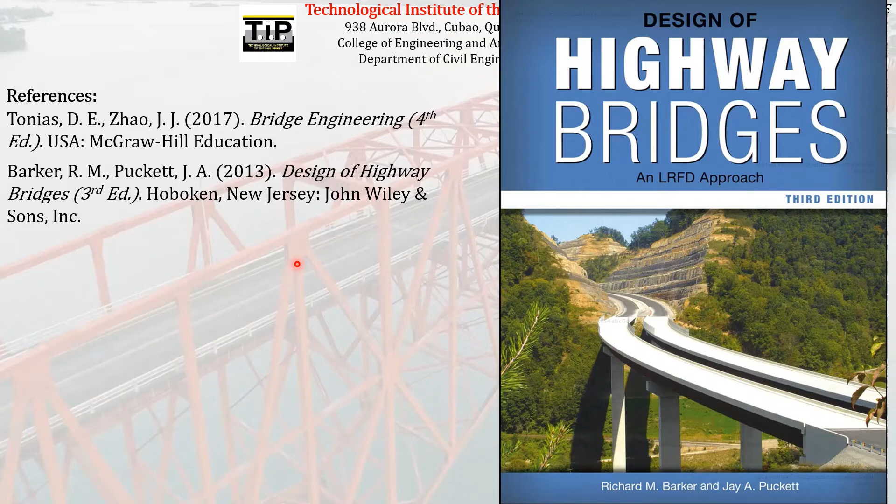And lastly, our local code that I will be using is the DGCS, the Design Guidelines, Criteria, and Standards, Volume 5, Bridge Design, 2015, from the Department of Public Works and Highways, Bureau of Design. So I have used AASHTO 2012 because as I checked, our local code is still using the AASHTO 2012 edition of the code. Although there is already a newer version of AASHTO, since our local code is still using AASHTO 2012, we will just stick to that edition of the code.

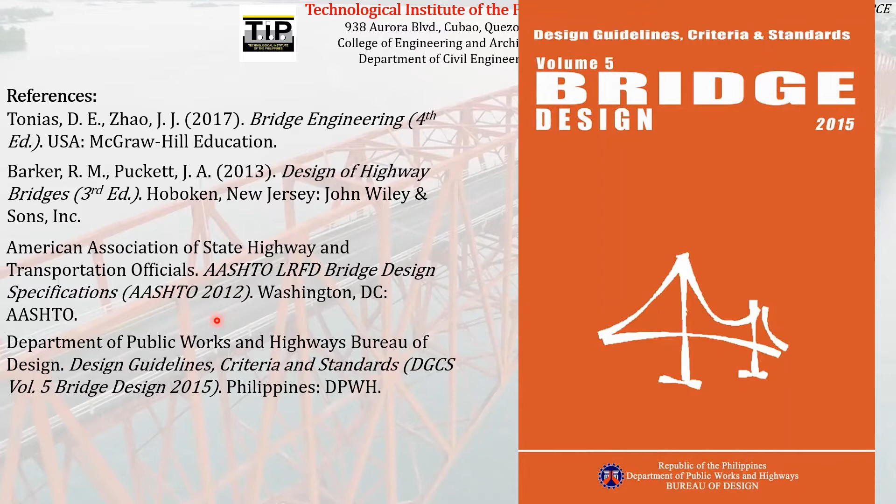And then lastly, the last reference that I have used is Google for some images and video clips.

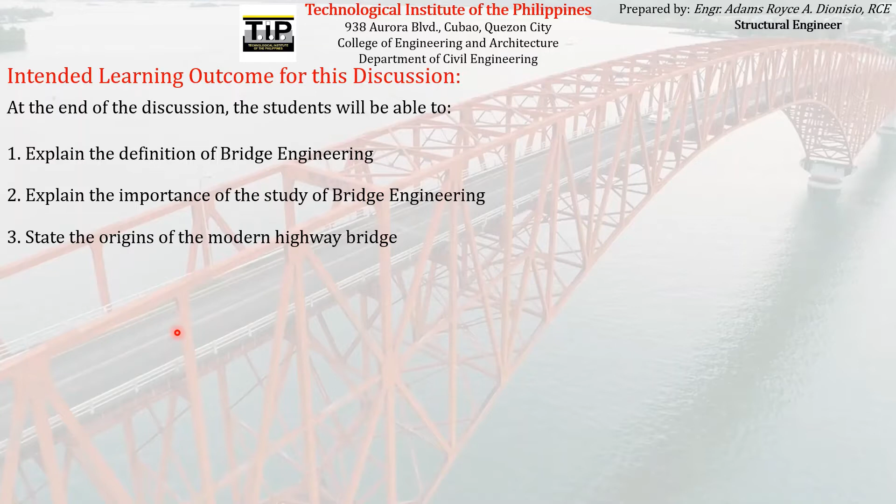So our intended learning outcomes for discussion are this. At the end of the discussion, the students will be able to: number one, explain the definition of bridge engineering; number two, explain the importance of the study of bridge engineering; number three, state the origins of the modern highway bridge; number four, define the different terms used in bridge engineering, especially the different parts of a bridge; and number five, define the different structure types used in bridge construction. So these are our goals for this discussion.

So at the end of discussion, I expect the students will now be able to explain the definition of bridge engineering, explain the importance of the study of bridge engineering, state the origins of the modern highway bridge, define the different terms used in bridge engineering, especially the different parts of a bridge, and lastly, define the different structure types used in bridge construction.

So without further ado, let us now address our first goal for this discussion, which is for you to be able to explain the definition of bridge engineering, and immediately after that, let us address our second goal, which is for you to be able to explain the importance of the study of bridge engineering.

So before we start to define the subject bridge engineering, maybe we need to know first what is a bridge. Because as the subject tells us, bridge engineering, we can easily tell that the subject is all about bridges.

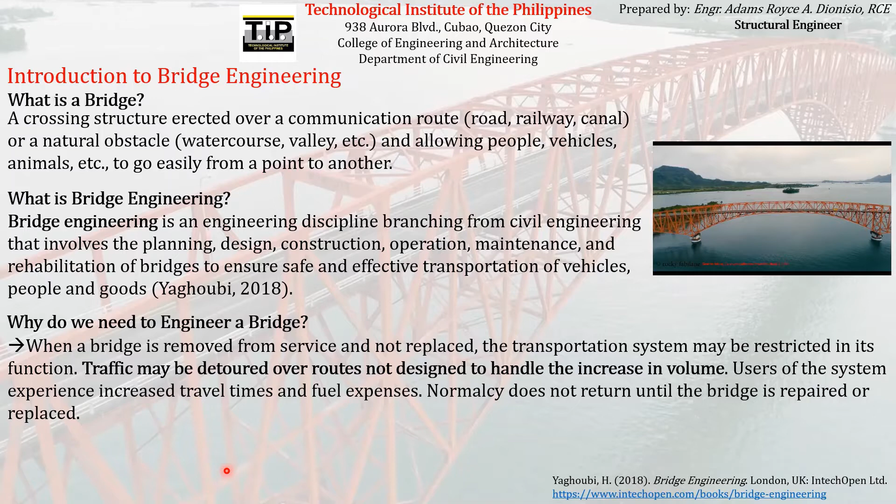Another reason why we need to engineer a bridge is this: when a bridge is removed from service and not replaced, the transportation system may be restricted in its function. Traffic may be detoured over routes not designed to handle the increase in volume. Users experience increased travel times and fuel expenses. Normalcy does not return until the bridge is repaired or replaced.

This is another reason why we need to engineer a bridge, because if we do not engineer it properly, it may have a very short useful life. After some time we need to stop the bridge from service, and if it is not replaced immediately, the transportation system of that region will no longer function normally due to the absence of the bridge.

For example, vehicles that normally traverse a particular region from one point to another using that bridge will no longer be able to travel that same distance, because the bridge is no longer there. It was stopped in service. Therefore, the vehicles must find another route to travel, and these other routes might cause travelers to have a longer route to traverse.

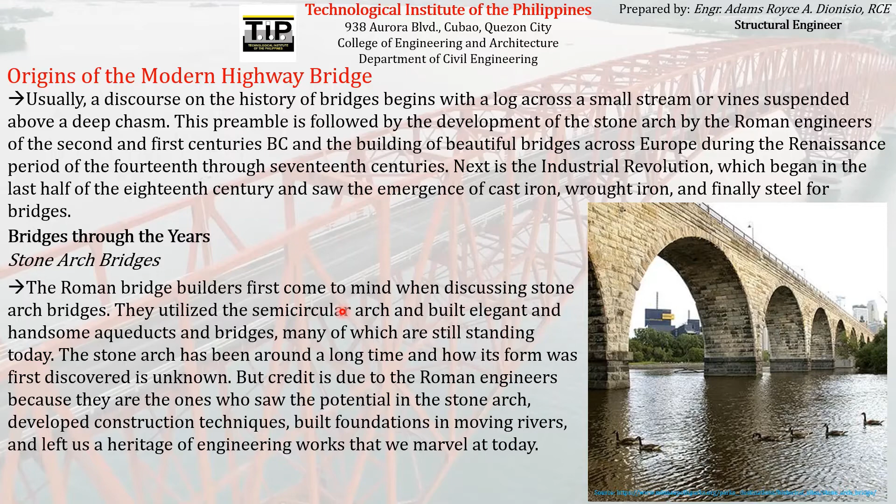They learned from building large mills how to increase clear spans by using the king post system or trussed beam. They also appreciated the arch form and its ability to carry loads in compression to the abutments. This compressive action was important because wood joints can transfer compression more efficiently than tension.

So after the Roman engineers used stone arches as their bridge, the use of wood was developed, because most of the bridge builders before were actually carpenter mechanics. So most of the time, the material readily available for the bridge builders of that day was just wood, coming from trees.

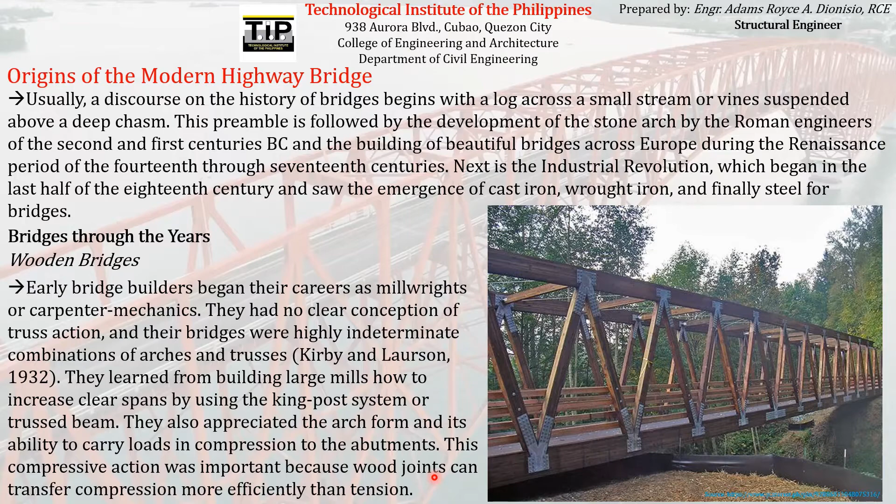Wooden bridges were serving the public well when the loads being carried were horse-drawn wagons and carriages. Then along came the railroads with their heavy loads, and the wooden bridges could not provide the necessary strength and stiffness for longer spans. As a result, wrought iron rods replaced wooden tension members, and a hybrid truss composed of a combination of wood and metal members was developed.

As bridge builders' understanding of which members were carrying tension and which were carrying compression increased, cast iron replaced wooden compression members, thus completing the transition to an all-metal truss form.

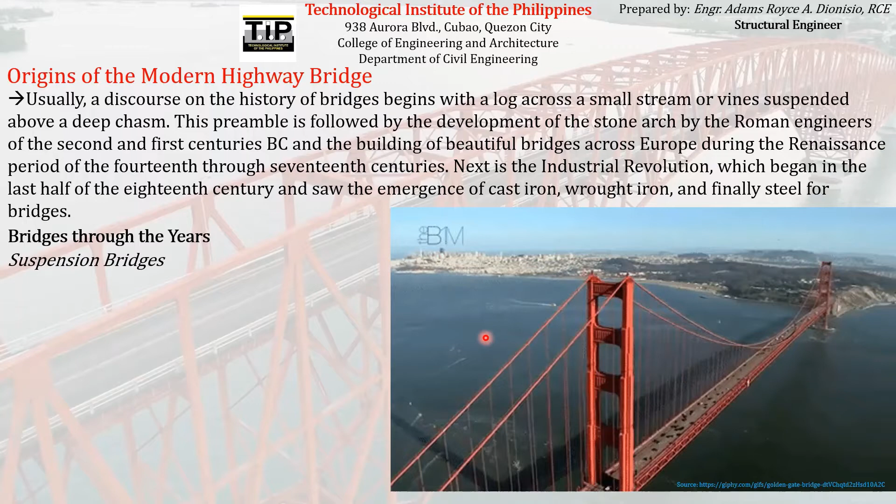So other bridges that came through the years are the suspension bridges. So suspension bridges look something like this. Actually, this bridge that you are seeing here is the famous Golden Gate Bridge located in San Francisco, USA. In previous suspension bridges, the roadway was flexible and followed the curve of the ropes or chains.

By stiffening the roadway and making it level, James Finley, who was attributed as the inventor of modern suspension bridges, developed a suspension bridge that was suitable not only for footpaths and trails, but for roads with carriages and heavy wagons. So the early suspension bridges that were developed before were all very flexible. Actually, the famous example of that flexible bridge that was built before is the Tacoma Bridge.

So you can search Tacoma Bridge on the internet, and you can see that very flexible bridge that swings even if there is actually no traffic traveling along that bridge. So you can see that Tacoma Bridge is very flexible, and it swings back and forth even with no strong wind or even with no traffic traversing it, until such time that this flexibility became the cause of the sudden failure of this Tacoma Bridge.

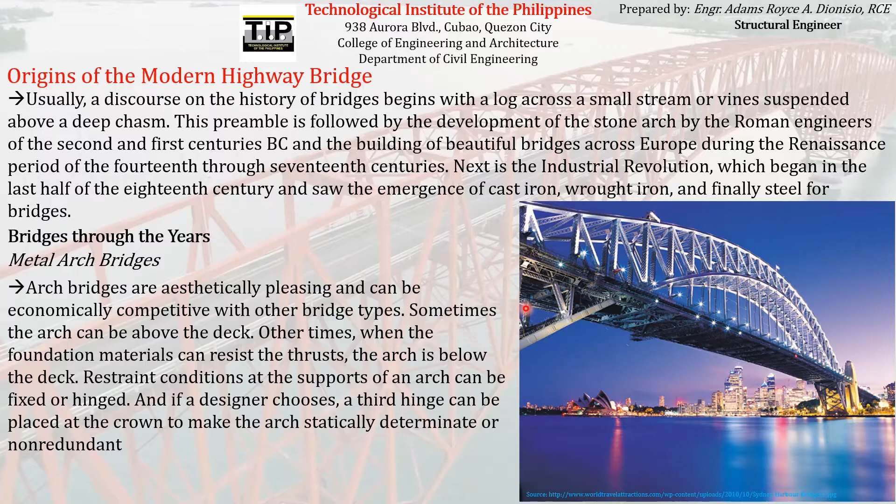Some concrete arches were built using the pre-stressing construction techniques first developed by the French engineer Eugène Freyssinet in the 1920s. So another bridge that was developed through the years are reinforced concrete bridges like this one. So as the name suggests, the bridge is made up of reinforced concrete, which is reinforced by reinforcing steel.

So usually we use pre-stress construction techniques to build reinforced concrete bridges, especially if the span of the bridge is kind of long. So if we have a long span bridge, usually we incorporate pre-stressing construction techniques for us to be able to construct that long span reinforced concrete bridge.

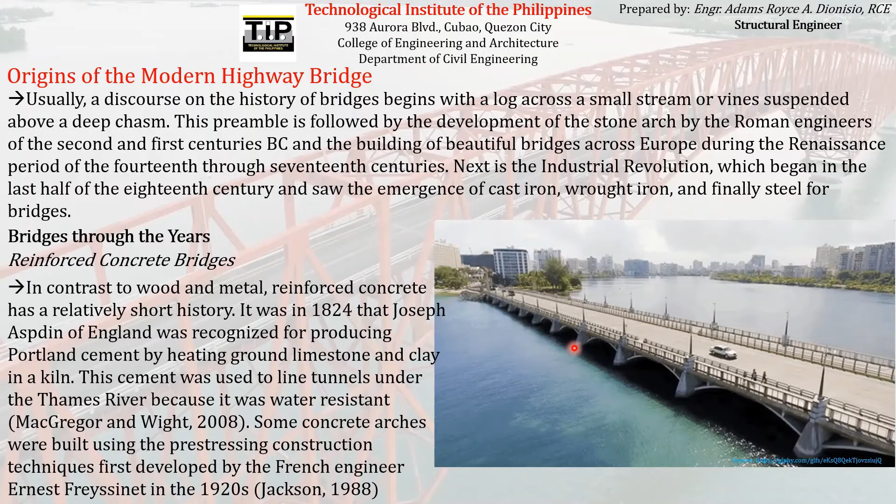Some of the early girder bridges, with their multiple short spans and deep girders, were not very attractive. However, with the advent of prestressed concrete and the development of segmental construction, the spans of girder bridges have become longer and the girders more slender. The result is that the concrete girder bridge is not only functional but can also be designed to be aesthetically pleasing.

So actually in our subject bridge engineering, especially the part of bridge design, we will be focusing more on how to design bridges of this type, girder bridges, which are supported by girders, either concrete girders or steel girders.

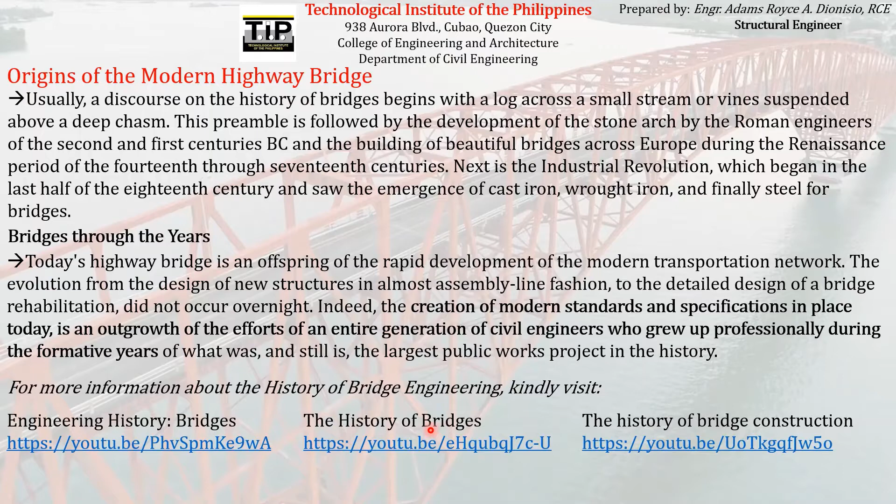So we are now done addressing our third goal, which is for you to be able to state the origins of the modern highway bridge. So now we will move on to addressing our second to the last goal for this discussion, which is for you to be able to define the different terms used in bridge engineering, especially the different parts of a bridge. So without further ado, let us start addressing our fourth goal.

So before we move on to studying bridge engineering, we will eventually encounter some bridge engineering terms that might be new to our ears. So before moving on studying bridge engineering, it is worth our time to familiarize ourselves with these bridge engineering terms, like the highway bridge site.

So what do we mean when we say highway bridge site? It is just a complicated place and the point where a suite of civil engineering disciplines converge. So this is the main topic of our engineering. This is the reason why we are engineering, because we have a highway bridge site. So this is where our engineering skills are being applied. So that is one term that we will encounter as we move on studying bridge engineering.

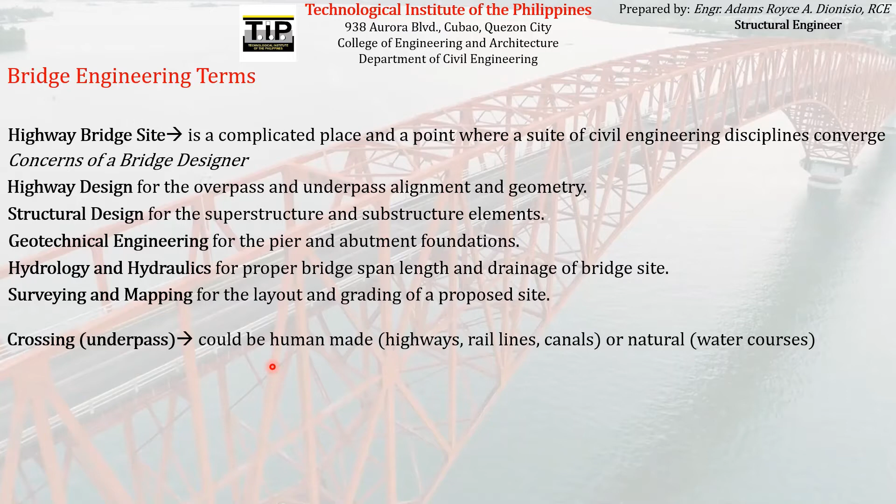So another term that we will encounter later on as we study bridge engineering is the word crossing or underpass. These are human-made, like highways, rail lines, or canals, or natural crossings like watercourses. So the crossing or underpass is actually the reason why we are building a bridge over them. These are the man-made or natural obstacles that we want to traverse or cross. That's why we usually build a bridge. So these can be man-made obstacles like highways, rail lines, or canals, or natural obstacles such as rivers or any body of water. We are building a bridge for us to be able to easily traverse this underpass or crossing.

Another term we will encounter as we study bridge engineering is the word span. Span is a segment of a bridge from support to support. If you can see the background of our PowerPoint, this is the San Juanico Bridge, and this is one of its supports. The other support can be found somewhere here. So the part of the bridge starting from one support to the other support is what we call the span.

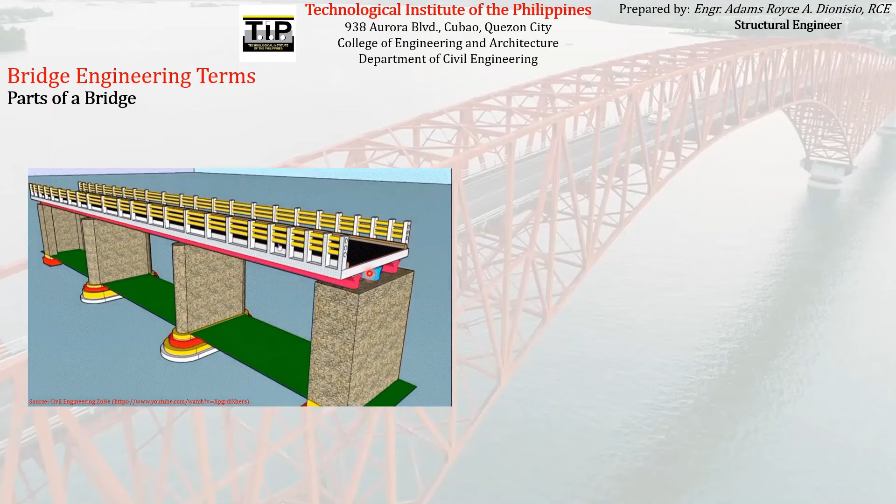The other terms we will encounter as we study bridge engineering are the different parts of a bridge. So the different parts of a bridge look something like this, or in actual terms, like this. These figures, photos, or GIFs show the most common parts of every bridge. So what are the most common parts of a bridge?

The first part of a bridge that is always present is the deck. This is the deck here, or in this figure, the black one. It is the part of the bridge where the traffic, the vehicles, travel. That is what we call the deck.

The part of the bridge that supports the deck is what we call the girder, if the bridge is a girder type bridge, like the one you are seeing in the figure — because there are actually different types of bridges that we will study later when we address our fifth goal for this discussion. So these are the girders, the parts of the bridge that support the deck.

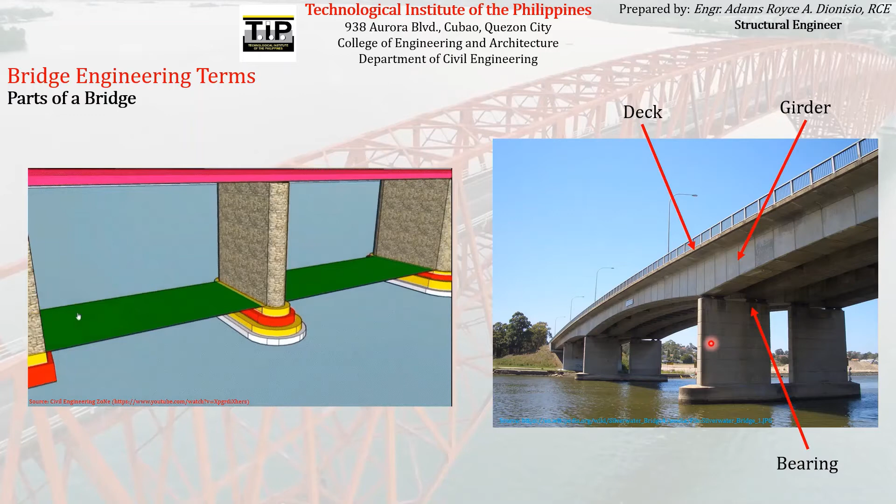The other part of the bridge where the bearing rests is what we call the pier. There are different types of pier that we will study later on. The pier looks something like this, or this. The pier is the part of the bridge that supports the bearing together with the girder and the deck.

And the other part of the bridge that supports everything — the pier, the bearing, the deck, and the girder — is what we call the footing. So this is the footing. The footing can be a shallow footing or a deep footing, depending on the quality of the soil at the highway bridge site. These are actually the most common parts of a bridge.

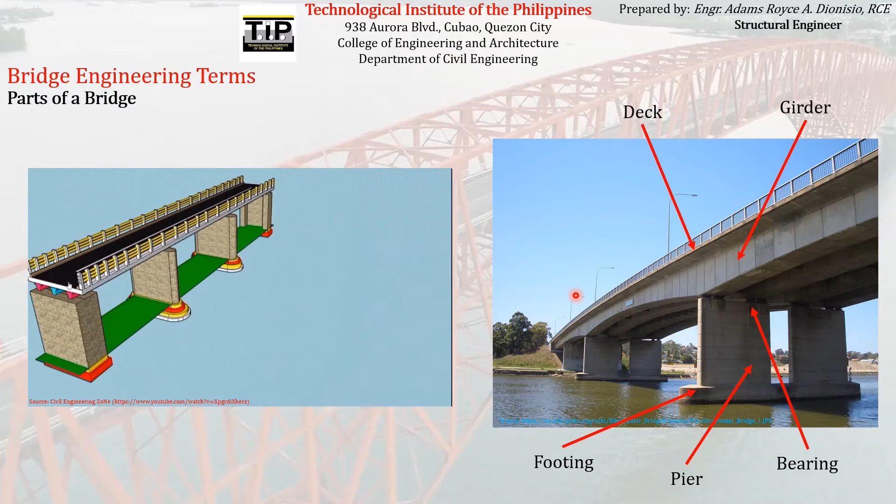Although there is a general term for these different parts of a bridge that we have to familiarize ourselves with, we will start studying it with the word superstructure. Superstructure is the general term we use to describe all of the components of a bridge above the supports — starting from the girder upward. That is what we call the superstructure, the part of the bridge supported by the supports.

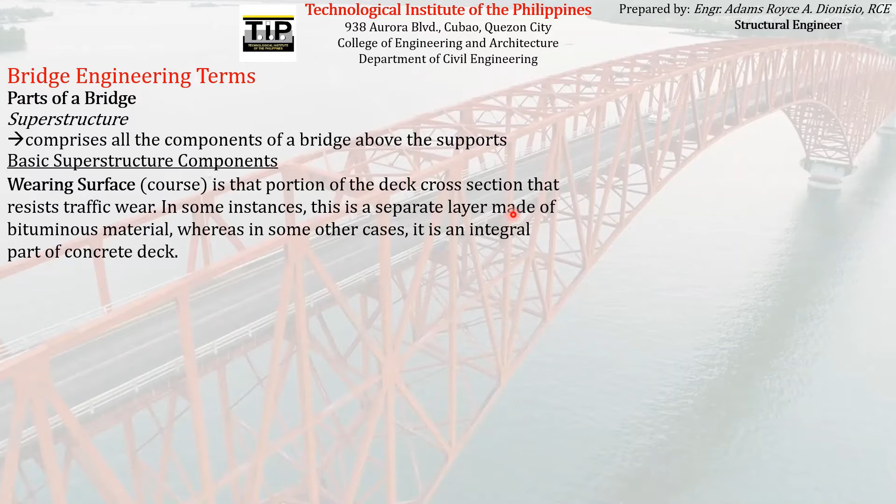There are different basic superstructure components. Just as I said before, superstructure is a general term that describes these basic components I will enumerate. The first one is the wearing surface or course — that portion of the deck cross-section that resists traffic wear. In some instances this is a separate layer made of bituminous material, while in other cases it is an integral part of the concrete deck.

We usually put another layer on top of the deck where the traffic and vehicles travel. If you can see this San Juanico Bridge in the background, the wearing surface is actually the roadway that is being traversed by the traffic or the vehicles. This wearing surface can be integrated on the deck, or sometimes, most of the time, it is just put as another layer made up of bituminous material like asphalt.

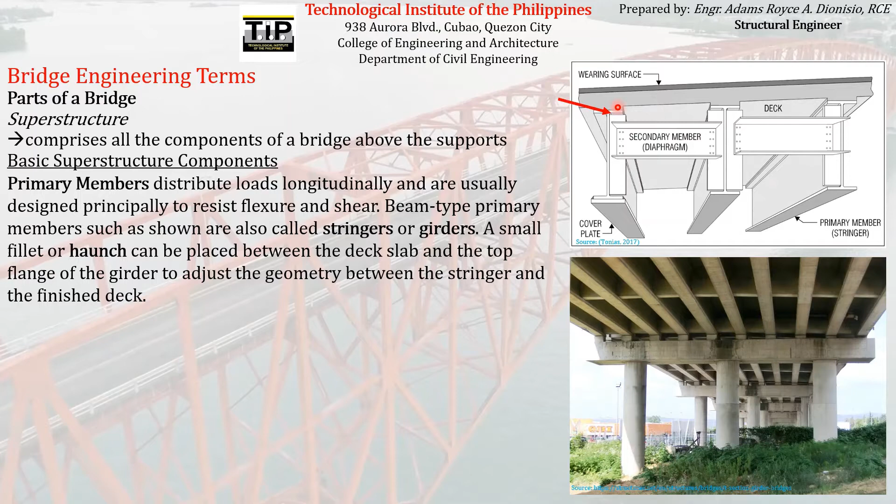These are the part of the bridge that supports the deck together with the wearing surface, where the deck is put on top. So as you can see here, sometimes we put a small space, which is what we call a haunch, between the deck and the top of the girder or the stringer, so that we can easily adjust the geometry between the deck and the girder. Because sometimes, especially if the bridge has a curvature shape, we need to super-elevate the deck itself. So we need to incline the deck, especially if that part of the bridge is curved, so that we can easily adjust the geometry between the deck and the girder. We can easily adjust the super elevation, incline the deck, if we put a haunch between the deck and the top of the supporting girder or primary member or stringer.

Another basic component of a superstructure is the secondary members, which are bracing between primary members designed to resist cross-sectional deformation of the superstructure frame and help distribute part of the vertical load between stringers. They are also used for the stability of the structure during construction. Secondary members composed of horizontal cross frames or lateral bracing at the top or bottom flange of a stringer are used to resist lateral deformation. In curved girder bridges, the diaphragms are considered primary members because they are load-carrying members that help resist torsion caused by vertical loads.

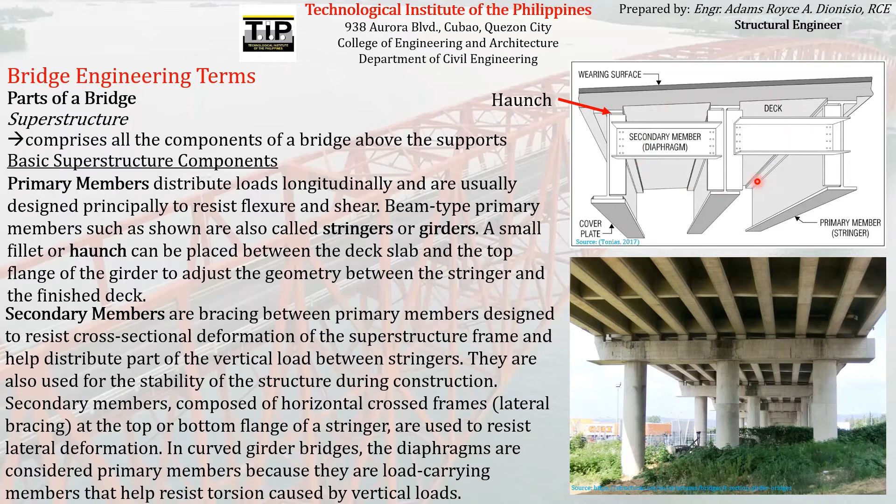So those are the basic components of a superstructure: the wearing surface, the deck, the primary member, and the secondary member. These are the parts of the bridge that are being supported by the substructure, which is another general term used to describe those parts of a bridge that support the superstructure.

So what do we mean when we say substructure? Substructure is the term we use to describe all of the elements required to support the superstructure. In other words, these are the components or elements of a bridge located below the superstructure, used to support it.

Just like the superstructure, the substructure also has its basic components. The first one is the abutments. Abutments are earth-retaining structures that support the superstructure at the beginning and end of a bridge.

Like a retaining wall, the abutments resist the longitudinal forces of the earth underneath the overpass roadway. Abutments are almost the same as piers, but the difference is piers are located at intermediate points between abutments, while abutments are located only at the beginning and end of a bridge.

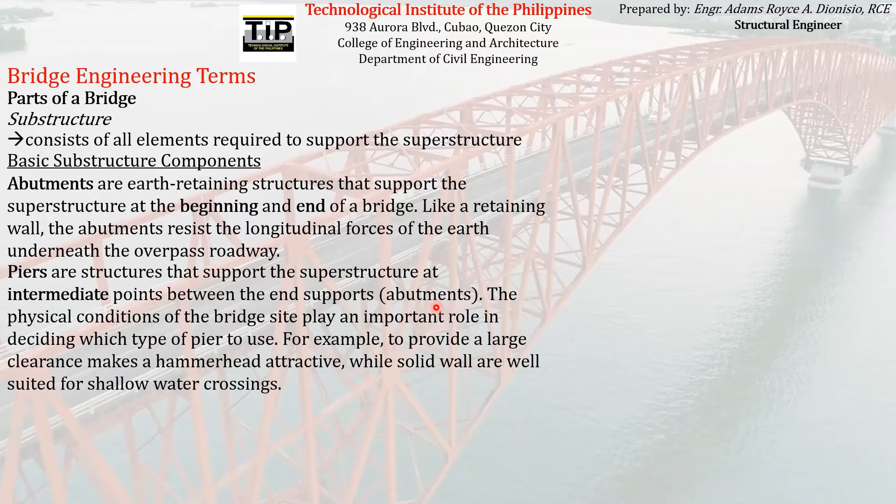So the other component of a substructure is what we call the pier. Piers, just like abutments, are structures that support the superstructure at intermediate points between the end supports, or the abutments. Piers are almost the same as abutments, but they are usually placed in intermediate points, or in between abutments. Abutments are usually placed at the beginning and end of a bridge to retain earth, while piers are located in between these abutments.

The physical conditions of the bridge site play an important role in deciding which type of pier to use. For example, to provide a large clearance makes a hammerhead pier attractive, while solid walls are well suited for shallow water crossings. So there are different types of piers, and deciding which type to use on a particular highway bridge site depends on the advantages of using that particular pier on that particular site.

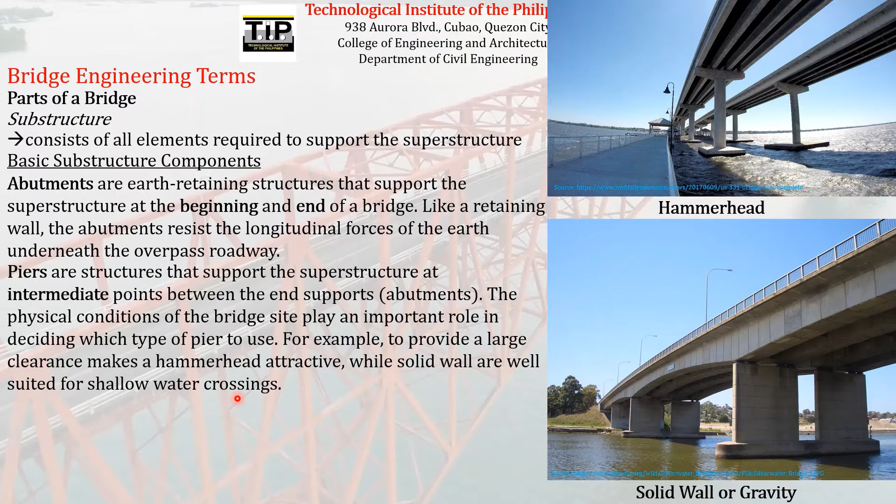If you have already seen one column bent pier here in the Philippines, we usually use this for skyways. So we usually use column bent pier on skyway bridges so that we will still have a clear space beneath the superstructure, so that the traffic volume, the traffic can still flow beneath the superstructure.

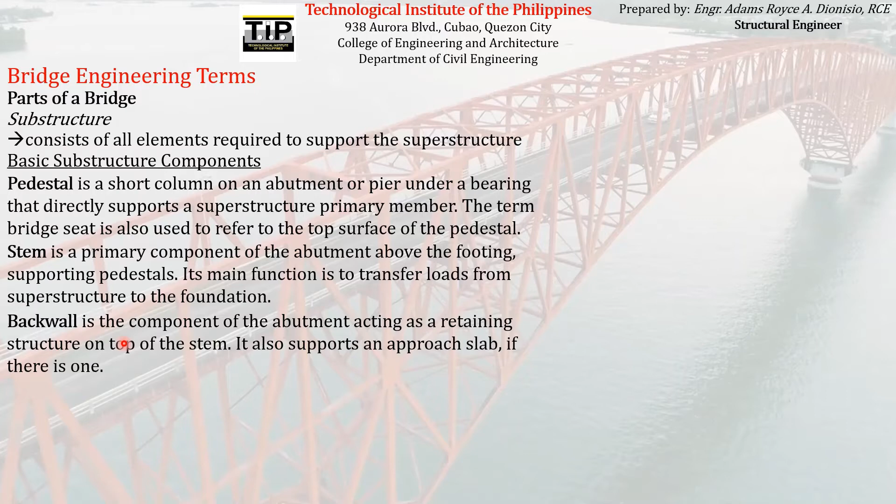What is the purpose of a wing wall? The purpose of the wing wall is the same as the purpose of the back wall and the abutment, which is to retain the earth behind the abutment. It is an additional assistance, an additional support to retain the earth behind the abutment.

You can usually find wing walls on expressways. If you have already traveled on expressways like NLEX or SLEX, you can find these wing walls where there is a bridge built over the expressway itself. So you can usually find those wing walls on expressways.

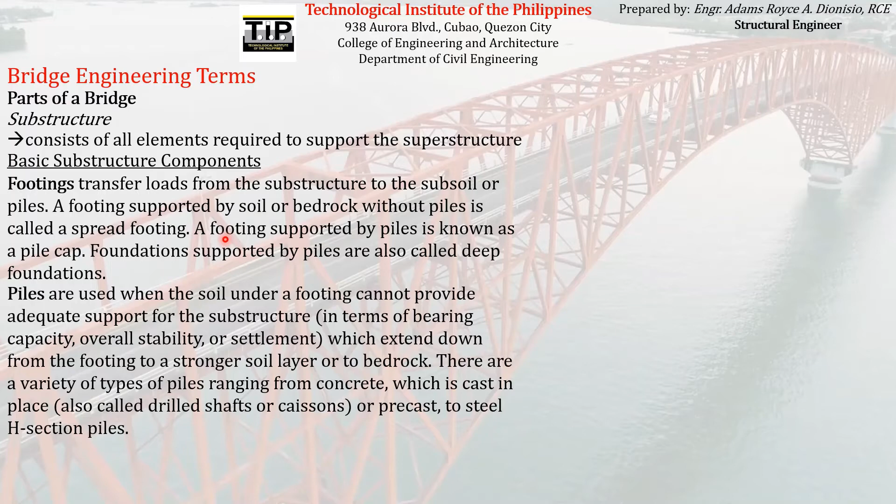So we usually use pile foundations on highway bridge sites that have a not so good quality of soil, in which case shallow foundations or spread footings are not advantageous to be used.

So those are the piles. That is what a pile looks like. And then again, that rectangular part of the foundation is what we call the footing or the pile cap. We usually call a footing a pile cap whenever we use it in deep foundations, whenever we insert a pile in it.

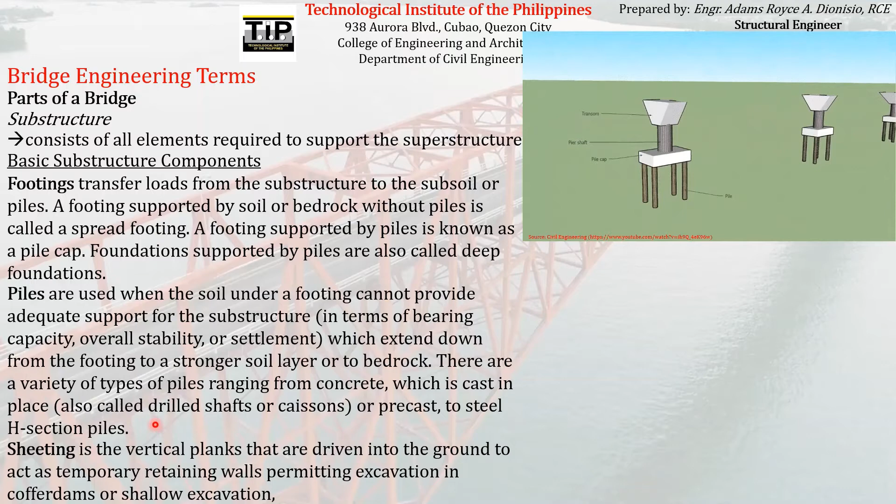So the last component of the substructure that we will study is the term sheeting. What is this component of a substructure? What do we mean by sheeting? Sheeting is the vertical planks that are driven into the ground to act as temporary retaining walls, permitting excavation in coffer dams or shallow excavations.

Usually in actual construction, in order to provide a temporary retaining wall, especially on construction projects located on bodies of water, we conduct what we call sheeting, wherein we insert a series of vertical planks deep beneath the earth, beneath the water surface, until we have an enclosed space like this one.

So when we already have an enclosed space like this one, excavation of the earth beneath the water surface can be started, as well as the drainage of the water inside the enclosed space made by the sheeting. This is how we usually construct the foundations of bridges located on bodies of water. We insert the sheeting, which acts as a temporary retaining wall, deep beneath the earth to form an enclosed space.

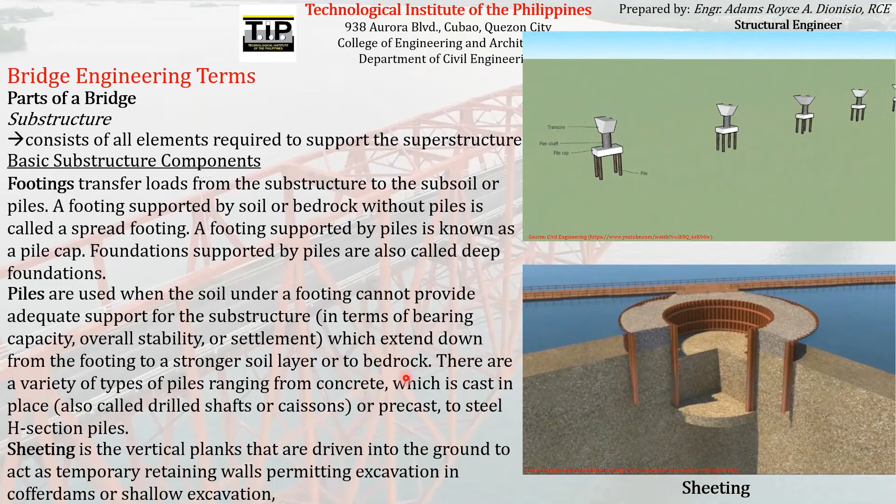So those are some of the basic components of a substructure. Those are the terms that we will encounter later on as we study bridge engineering. Another general term that is used to describe the different parts of a bridge are what we call appurtenances and site-related features. So what are these?

What are appurtenances? Appurtenance is any part of the bridge or bridge site that is not a major structural component yet serves some purpose in the overall functionality of the structure, such as guardrail. So appurtenances are those parts of a bridge that don't have a major role in supporting the whole bridge structure, but still serve some purpose in the overall functionality of the structure, such as a guardrail. In other words, appurtenances are just like an accessory to the bridge.

So these are just the major appurtenances and site-related features that can be found in every bridge. The slope that tapers from the abutment to the underpass or embankment is covered with a material called slope protection, which should both be aesthetically pleasing and provide for proper drainage and erosion control. For waterway crossings, large stones, also called riprap, are usually used for slope protection and foundation scour protection.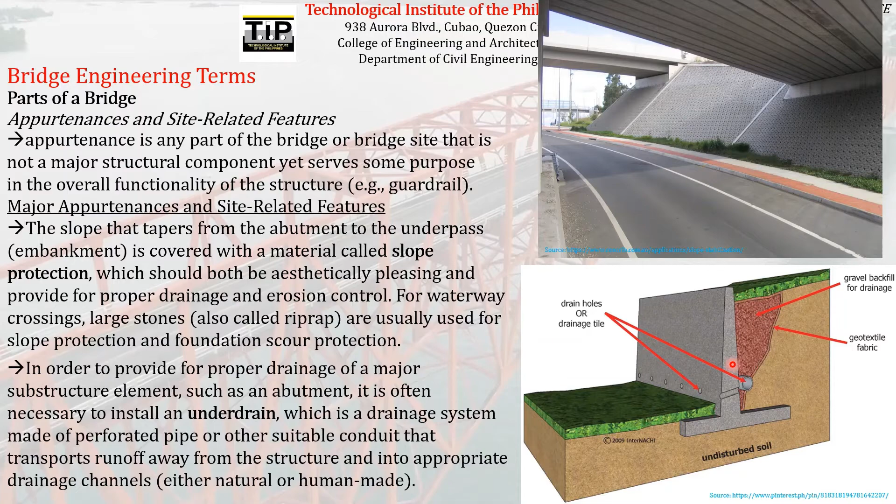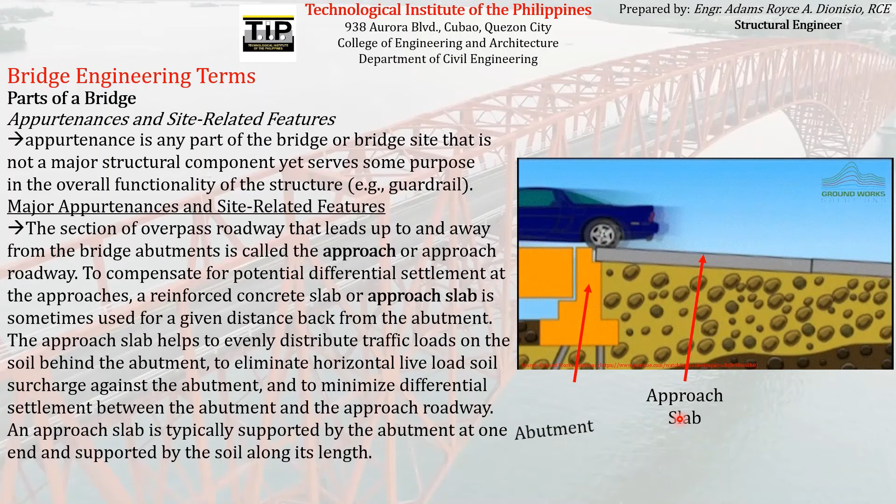So this is again another appurtenance or site-related feature that can be found in a bridge. This is what we call the approach slab. So this short slab that you are seeing here is what we call approach slab, and this part here is what we call the abutment, and this part here is what we call the approach roadway. So as you can see on the figure or on the GIF, the approach slab is that slab that connects the abutment to the approach roadway.

So one purpose of this approach slab is to evenly distribute traffic loads on the soil behind the abutment. So that's one purpose of the slab, to evenly distribute these loads, the traffic loads, the vehicle loads that are being supported by the approach slab, evenly beneath the soil. So it distributes the traffic loads evenly on the supporting soil behind the abutment. So that's one purpose of the approach slab.

Another purpose of the approach slab is to minimize differential settlement between the abutment and the approach roadway, because as the traffic travels along the approach roadway to the bridge, sometimes there will be a settlement that will happen on the abutment as well as on the roadway. So in order to prevent differential or different amount of settlement between the abutment and the approach roadway, we usually put an approach slab, again to minimize the differential settlement between the abutment and the approach roadway.

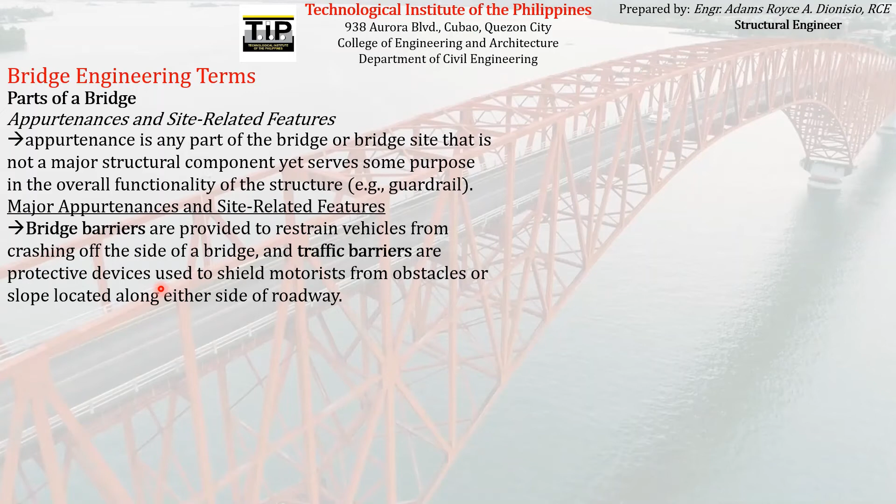Another appurtenance or site-related feature that can be found in a bridge are bridge barriers and traffic barriers. So what are bridge and traffic barriers? Bridge barriers are provided to restrain vehicles from crashing off the side of a bridge, and traffic barriers are protective devices used to shield motorists from obstacles or slope located along either side of a roadway.

So what do bridge barriers look like? So this is a bridge barrier. You can see bridge barriers on either side of a bridge with the purpose of preventing the vehicles from crashing off away from the bridge itself. So that is the bridge barrier, the feature that you are seeing on the side of every bridge. And the traffic barrier looks something like this. This is an example of a traffic barrier.

Traffic barriers serve different purposes. Sometimes traffic barriers are used to divide the bridge or the road into several lanes. Sometimes it is used to prevent vehicles or the traffic from crossing one lane to the other. And sometimes a traffic barrier is used to shield motorists from obstacles or slope located along either side of a roadway.

Say for example, if there is a construction activity happening on one side of the roadway, sometimes we use a traffic barrier so that the vehicles that are using the bridge will be prevented from crashing into that construction site on the particular bridge that we are concerned with. So those are the bridge barrier and traffic barrier.

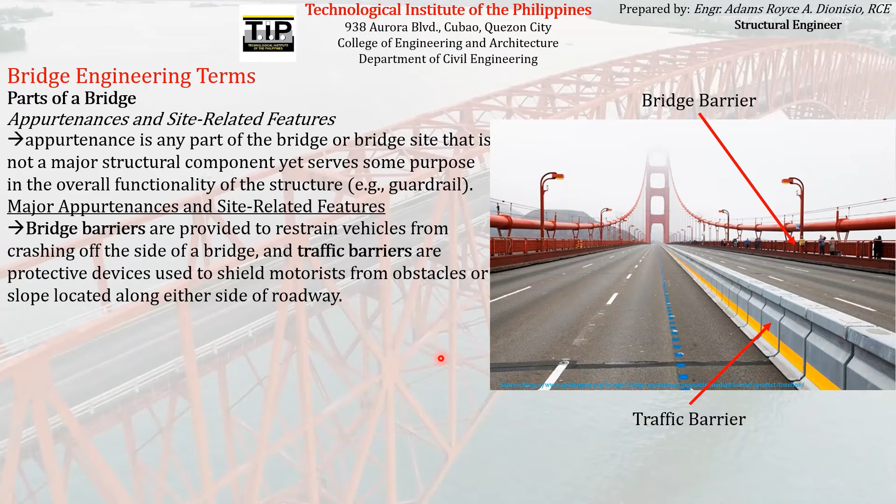Another general term used to describe parts of a bridge is what we call miscellaneous terms. Before we start on engineering a bridge, it's worth it to familiarize ourselves with these miscellaneous terms.

The first of the miscellaneous terms we will study is the vertical clearance. Vertical clearance is the minimum distance between the structure and the highway underneath, such as this.

Usually we provide vertical clearance whenever we build a bridge over a highway. So there is a highway underneath a bridge, and in those cases we usually provide vertical clearance, the distance between the highway and the soffit or the bottom of the bridge.

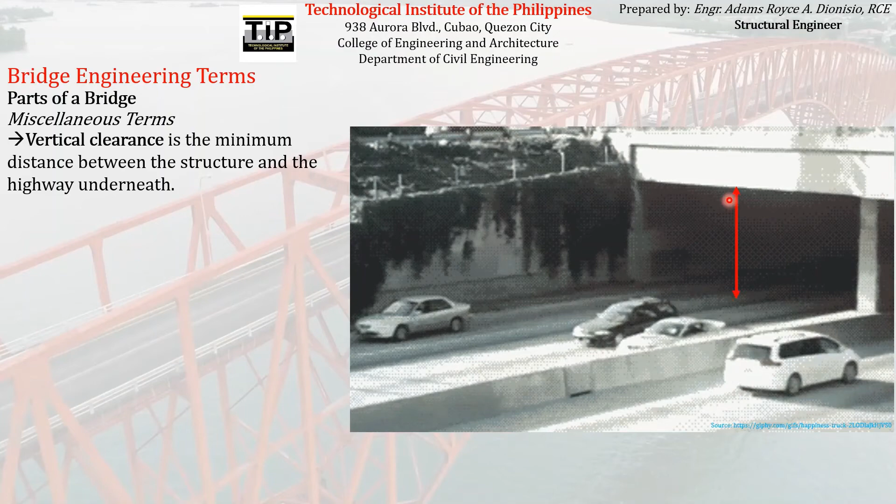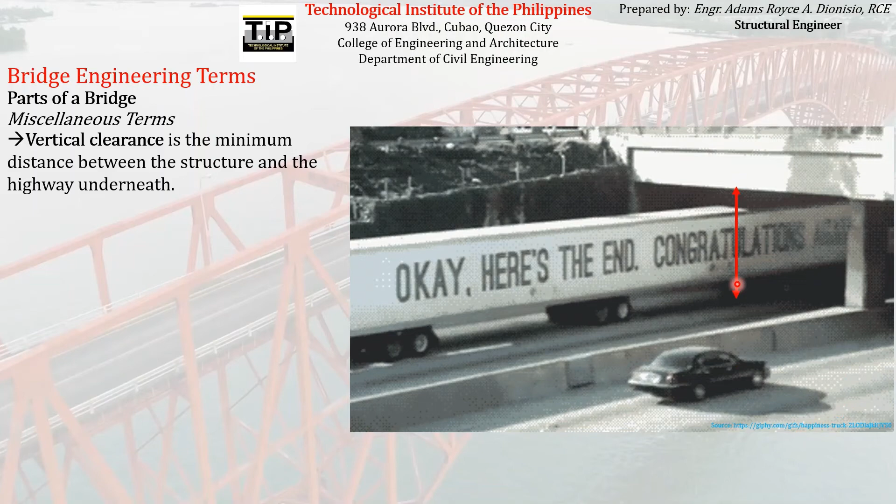The purpose of having a vertical clearance is to allow traffic or vehicles underneath the bridge to safely travel, providing adequate space especially for vehicles of greater heights, so that there will be adequate space for them to safely travel beneath a certain bridge.

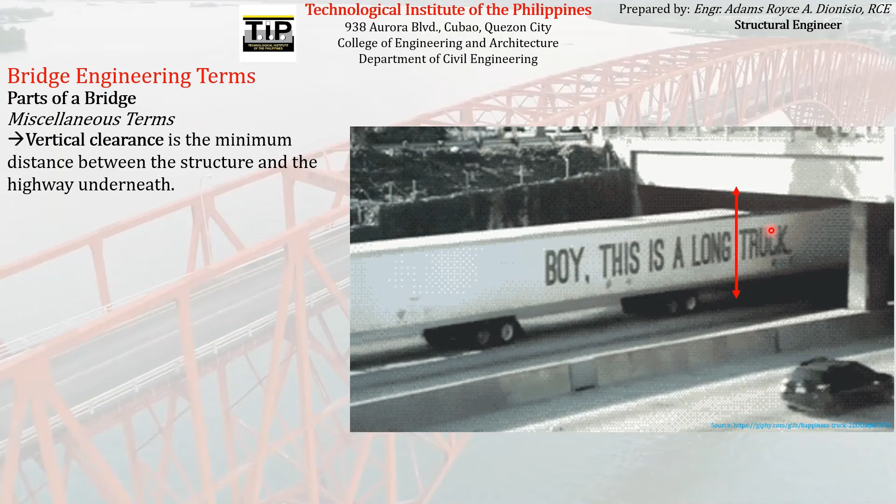Usually you can see vertical clearances on structures such as this or in tunnels. Whenever you traverse a tunnel, you can also find this, and on any roads or highways that have a vertical limitation, we usually provide a vertical clearance.

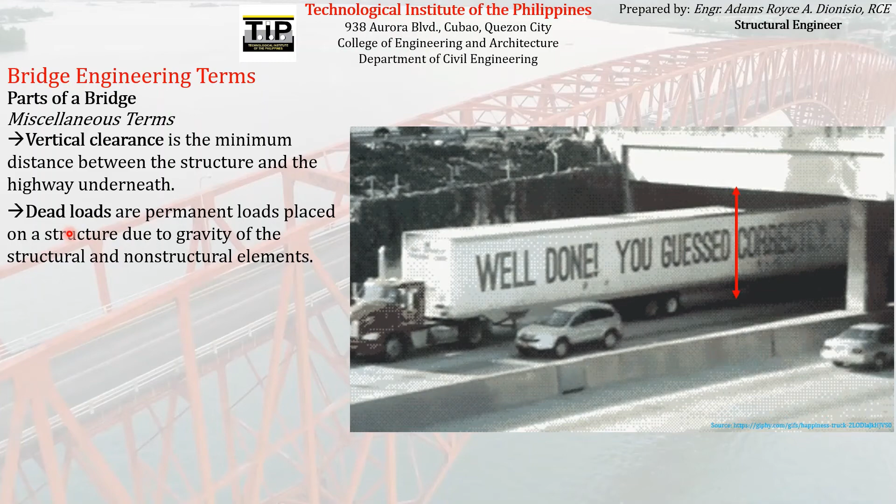Another miscellaneous term that describes a part of a bridge is what we call dead loads. Dead loads are permanent loads placed on a structure due to gravity of the structural and non-structural elements. These dead loads are actually part of the bridge that are fixed in position.

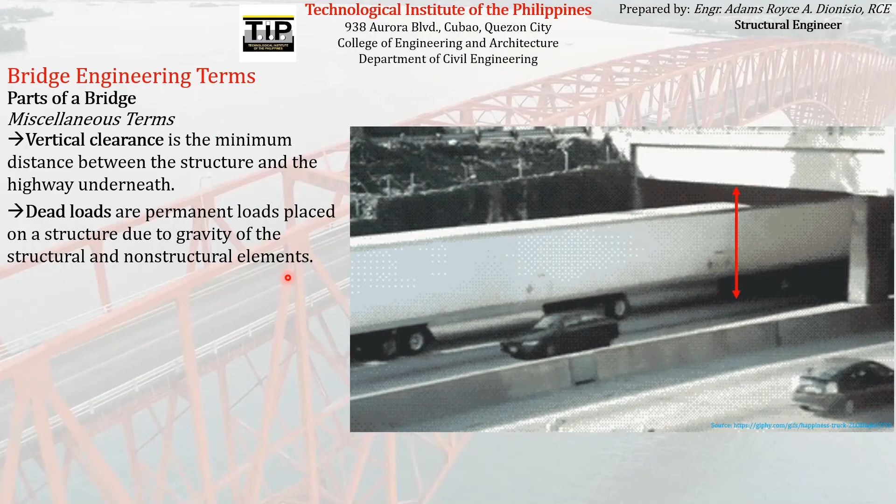Some examples of dead loads are the weight of the bridge itself and its components, like the weight of the deck, the weight of the girders or the primary and secondary members, the weight of the piers, the weight of the footings, etc. Those are examples of the dead loads that comprise the bridge itself.

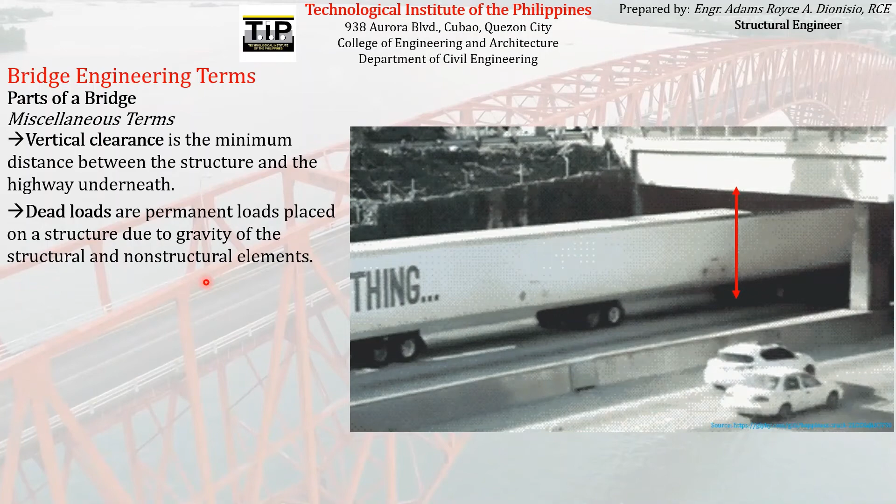Again, dead loads are loads that are permanent, meaning they are being carried by our bridge and are fixed in position. That is the keyword to define dead loads: loads that are fixed in position, meaning their position doesn't vary with respect to time.

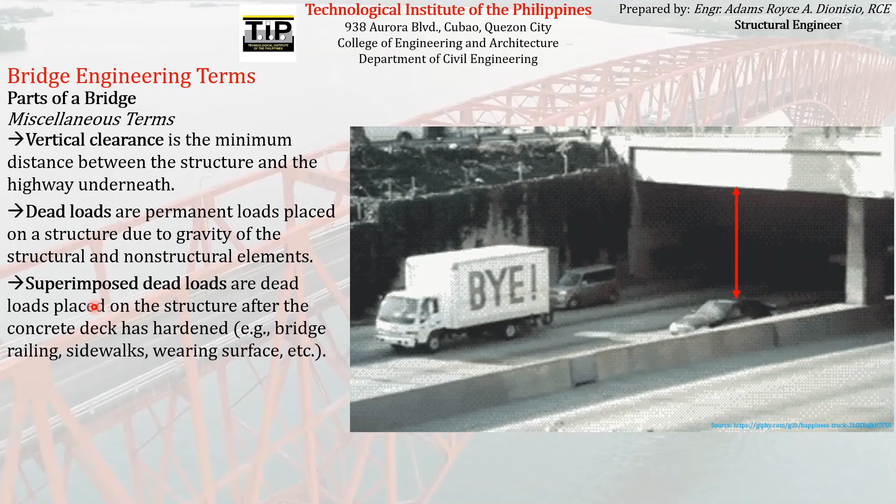Another miscellaneous term we must study is the superimposed dead loads. These are dead loads placed on the structure after the concrete deck has hardened, like the bridge railing, the sidewalks, the wearing surface, etc.

Superimposed dead loads are actually still dead loads, but the main difference is these are dead loads placed over our bridge after the concrete deck has hardened. In other words, they are not integrally part of our structure, but are just placed over our structure or bridge.

Dead loads are loads carried by our bridge that are integrally part of our structure, while superimposed dead loads are dead loads placed on top of our structure after the concrete deck has hardened. Some examples of superimposed dead loads are bridge railings, sidewalks, and wearing surface.

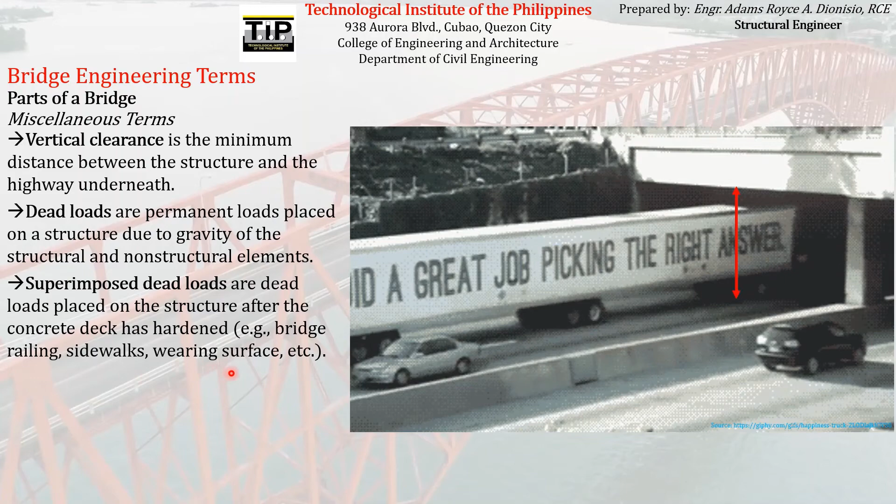Another miscellaneous term to define a part of a bridge are live loads. Live loads are temporary loads placed on the structure, such as vehicles and pedestrians. The keyword to define live loads is that they are loads carried by our structure that have varying magnitudes and varying positions, meaning they are not permanent in position with respect to our bridge.

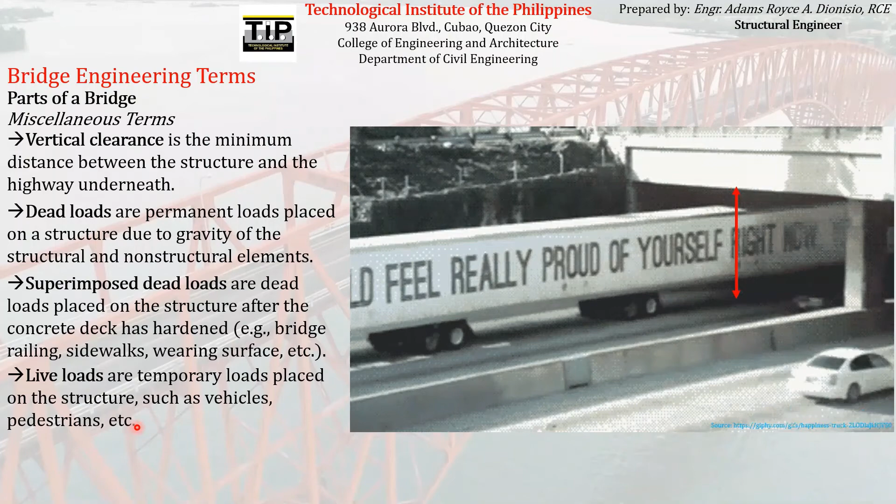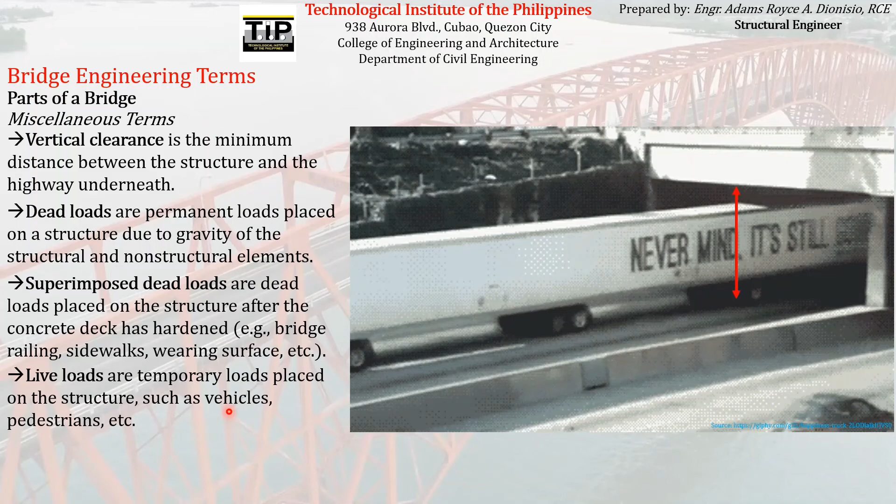Some examples of live loads carried by our structure are vehicles. Obviously, vehicles change in position as they travel along our bridge or roadway, so they can be considered live loads because, as defined, live loads are loads carried by our structure that have no permanent position.

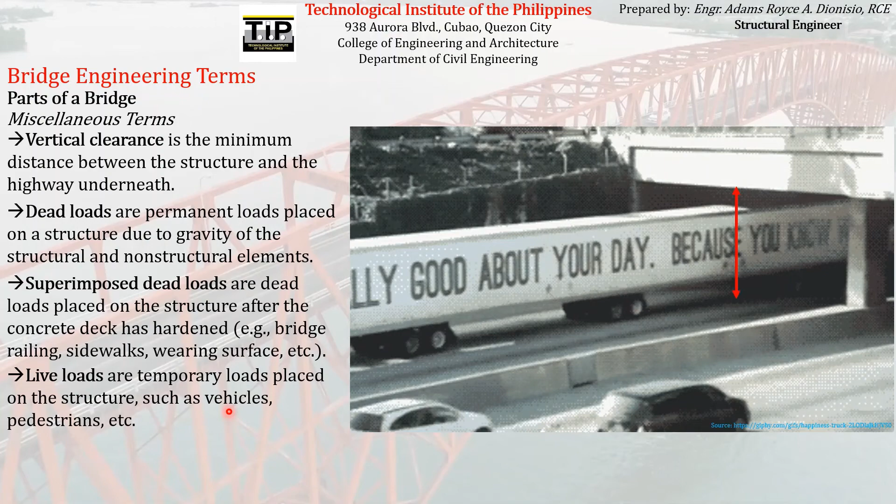So these live loads are those loads being carried by our bridge, by our structure, that have no permanent position or magnitude. One example is a vehicle or pedestrian traveling along our bridge. They are using our bridge, but they are not fixed in position; their position varies with respect to time. So if they don't have a fixed magnitude and fixed position, we can consider them as a live load.

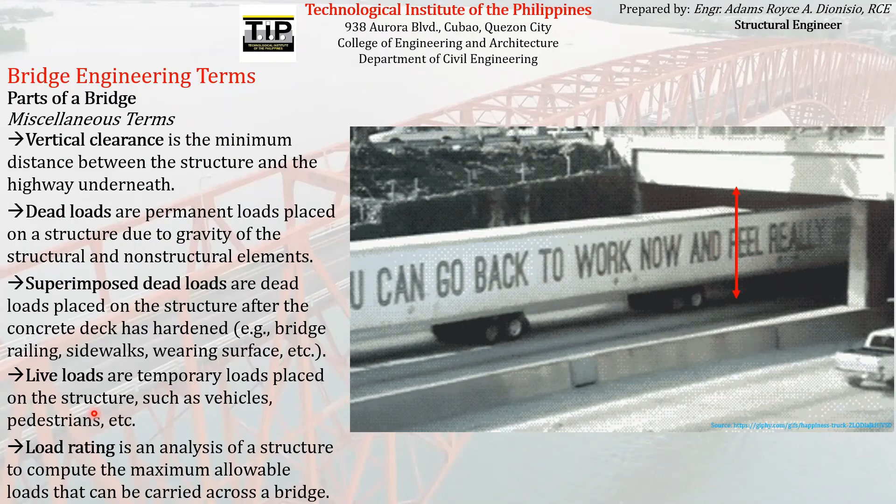Another miscellaneous term for us to be familiar with is load rating. Load rating is an analysis of a structure to compute the maximum allowable loads that can be carried across a bridge. This load rating is actually those signs you see when you enter a particular bridge, like a signage that says 10 tons, meaning the maximum allowable load or weight that can use that bridge is up to 10 tons only.

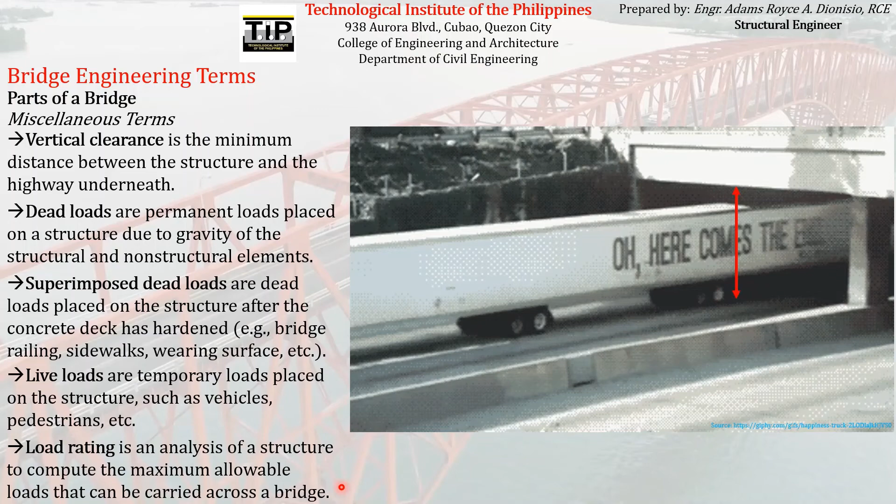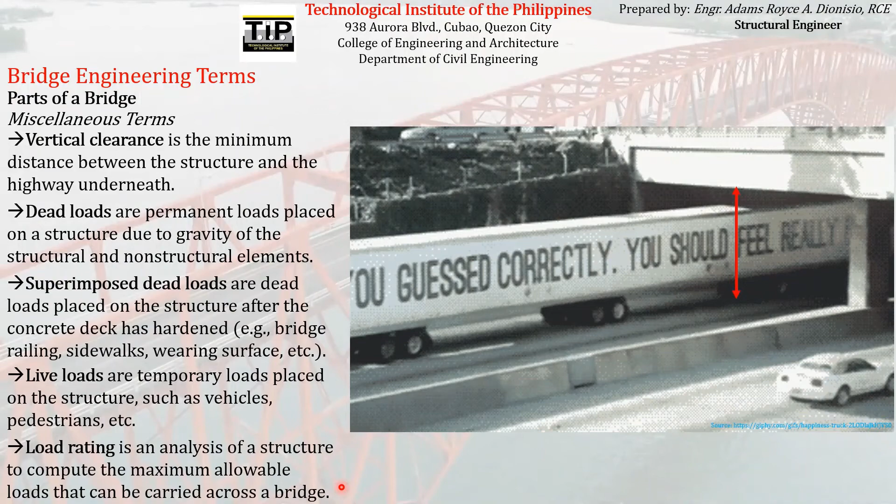So vehicles that have a weight over 10 tons cannot use that particular bridge. That signage we usually see when we enter a bridge is what we call the load rating. This rating is found through the analysis of the structure, of the bridge. We analyze and design it to know what maximum load it can accommodate, usually for bridges or structures that are already old, because the strength of a structure deteriorates as time goes by.

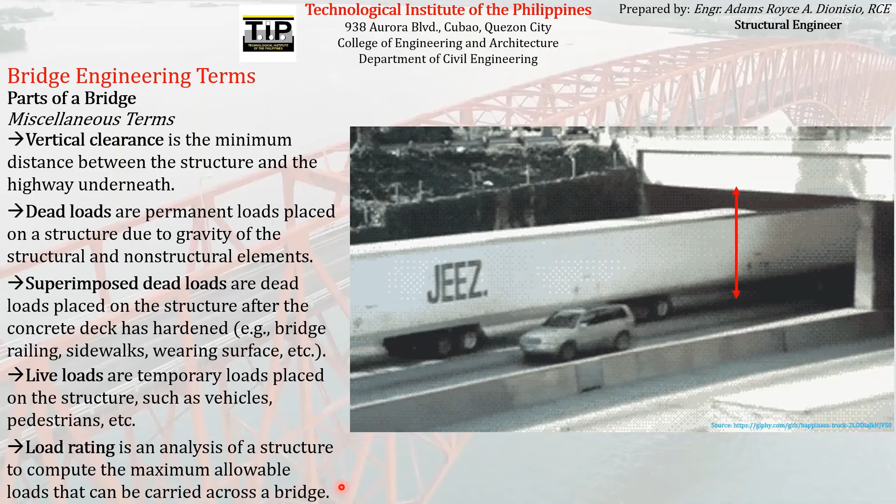So therefore, we must continually analyze it in order to know the reserve or available strength that it still has, so that failure of that particular bridge or structure will be prevented.

Another miscellaneous term that we must be familiar with is the sheeted pit. We already found an overview of this term, similar to what we described a while ago as sheeting. So what is a sheeted pit? A sheeted pit is a temporary box structure with only four sides that can be used as an earth support system in excavation for substructure foundations. The bracing elements used inside a sheeted pit to keep all four sides rigid are called wales, which run along the inside walls of the sheet piling, and struts, which run between the walls.

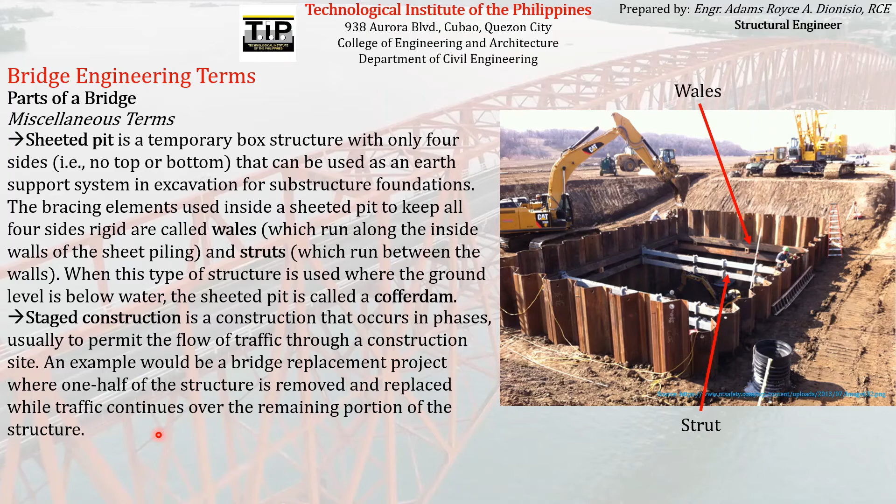Its main purpose is to prevent the stoppage of the flow of traffic even while construction activity is ongoing. One famous or noticeable example of staged construction is whenever our local agency, our local public works agency, fixes our roads.

As you notice, whenever our local public works agency fixes our roads, they usually don't do it on the whole road. They usually do the construction work on only half of the road in order for traffic to still flow on the other half. After they finish paving one side of the road or highway, they will start constructing on the other side so that traffic will now flow on the side that is already finished.

So that particular way of constructing is what we call staged construction - construction that occurs in phases, with the main purpose of preventing the stoppage of traffic flow.

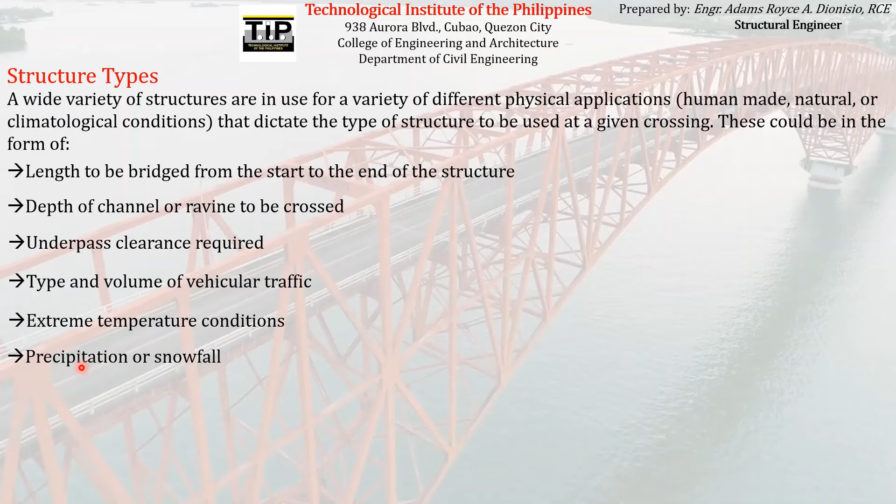Another basis is the depth of channel or ravine to be crossed. Another is the underpass clearance required, the type and volume of vehicular traffic, extreme temperature conditions, precipitation or snowfall, curvature of overpass alignment, aesthetics of the surrounding environment, and lastly, potential environmental impacts. These factors can dictate which type of structure will be used at a given crossing.

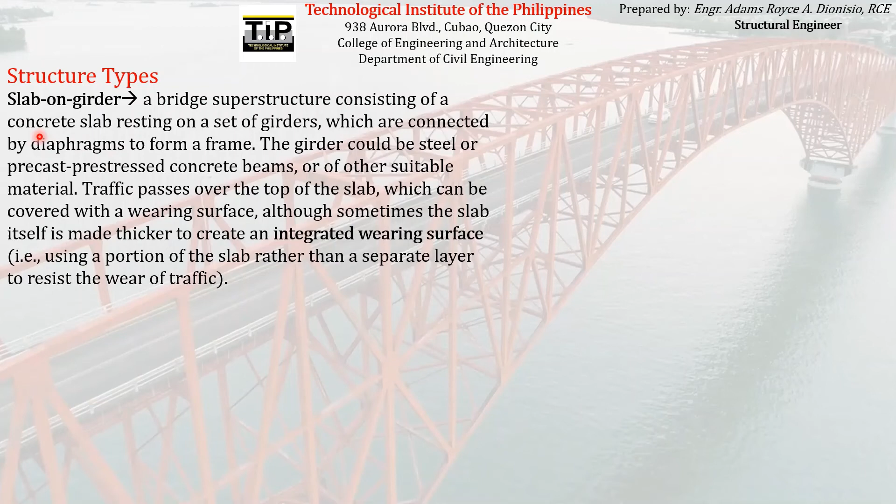Since we are talking about structure types, there are actually several types of bridge structure that can be made depending on the location, or depending on the different factors we have enumerated. So the first type of bridge structure we will study is the slab-on-girder.

Slab-on-girder looks something like this. This is actually the most common type of bridge structure, that's why we will be focusing more on this type in our study of bridge engineering. A bridge superstructure consisting of a concrete slab resting on a set of girders connected by diaphragms to form a frame - there is a slab supported by a series of girders that form a frame.

The girder could be steel or precast pre-stressed concrete beams or other suitable material. So these supporting diaphragms, or primary members, or girders can be made out of steel or precast pre-stressed concrete beams.

Traffic passes over the top of the slab, which can be covered with a wearing surface, although sometimes the slab itself is made thicker to create an integrated wearing surface, using a portion of the slab rather than a separate layer to resist the wear of traffic. So this slab can be covered with a wearing surface - an additional layer of surface put on top of the deck, like bituminous material or asphalt.

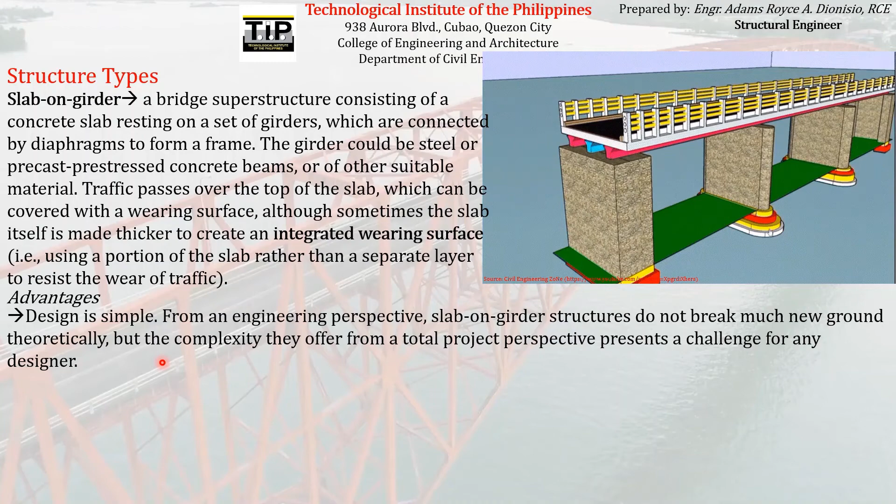Another advantage is the slab on girder bridge lends itself well to a uniform design that can be standardized easily. Standardization minimizes the need for creating a plethora of codes and specifications for designers to follow, especially when many owners of bridges rely on private consultants to assist in the design of new and rehabilitation of existing bridges. Uniformity also means that consistent and therefore economical methods can be employed in repairing deteriorated structures. Imagine if a highway network had hundreds of unique designs with customized components for each structure.

This is another advantage of using slab on girder - its design can be easily standardized, meaning we don't need a new set of codes and specifications for designers to follow. We can easily standardize the design, we can make a uniform design out of it that can be easily followed by designers. We don't need new sets of codes and specifications just to design a slab on girder type of bridge structure.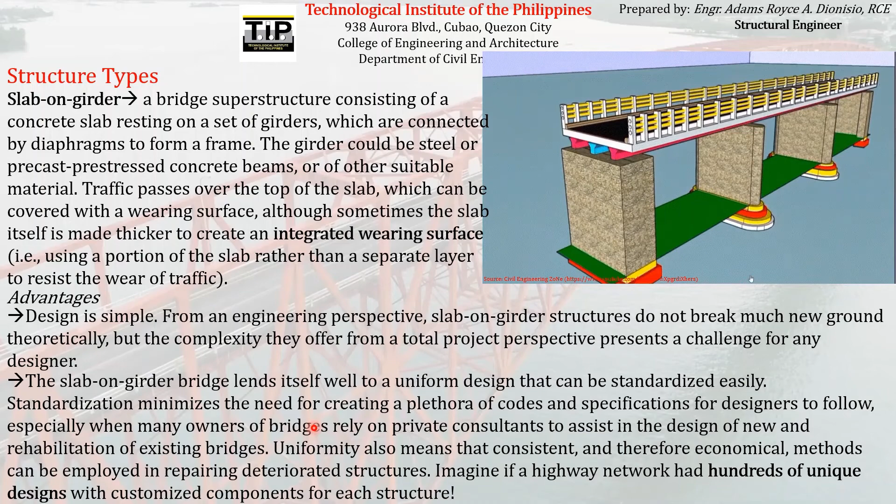So that's another advantage of using this type of bridge structure. Its design can be easily standardized, and due to that, we don't need to follow several series of new codes and specifications just to design it. That's another advantage of slab on girder.

Another advantage is that construction is relatively straightforward and makes use of readily available materials. Prefabricated primary members such as steel wide flange stringers or pre-stressed concrete beams allow for quick erection and a clean appearance, and at the same time provide for an economy of materials that is a benefit to the contractor as well as the owner.

This is another advantage of using a slab on girder type of bridge structure - its construction is relatively straightforward and somehow easy to be done. In addition, the materials needed to construct it are usually readily available because there are prefabricated primary members such as steel wide flange stringers or pre-stressed concrete beams that allow for quick erection of a slab on girder type of bridge structure.

So that's another advantage of using slab on girder type of bridge structure. Its construction is simply straightforward, and since there is no special construction technique needed, the cost of constructing it can be minimized. That is an advantage to the contractor as well as the owner, and also in the availability of materials needed. You don't have to fabricate specialized materials just to construct a slab on girder.

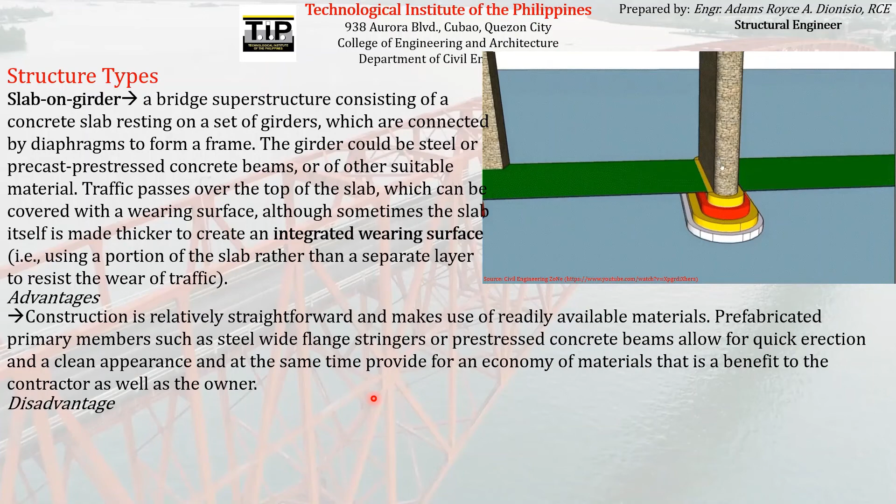If there are advantages of using slab on girder type of bridge structure, there is also a disadvantage. The only disadvantage is that it will be primarily used for short to medium span lengths, up to 300 feet or 91 meters for steel girders, and 160 feet or 49 meters for pre-stressed concrete girders. We can just use this type for short to medium span lengths. For spans of greater lengths, we have to use other types of bridge structure, because the disadvantage of slab on girder type of bridge structure is that it is limited to short to medium span lengths.

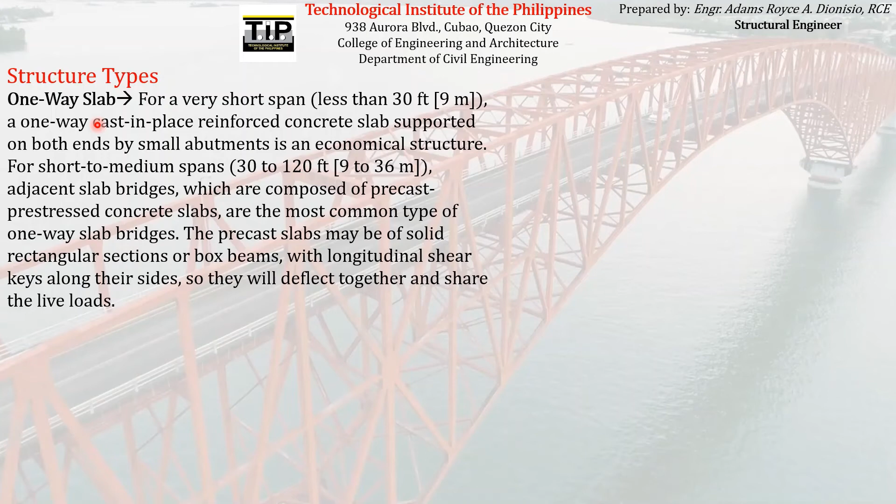Another type of bridge structure usually used in construction is the one-way slab type of bridge structure. It looks something like this. For a very short span, like less than 30 feet or 9 meters, a one-way cast-in-place reinforced concrete slab supported on both ends by small abutments is an economical structure. So if the span that will be connected by a bridge is very short, like 30 feet or 9 meters, one-way slab type of bridge structure is an economical choice. In a one-way slab type, we have a one-way slab supported by two abutments on each end. When we say one-way slab, the slab just bends on one direction. That's why it's called one-way slab. The bending just occurs on one direction.

For short to medium spans, like 30 to 120 feet or 9 to 36 meters, adjacent slab bridges, which are composed of precast prestressed concrete slabs, are the most common type of one-way slab bridges. The precast slabs may be solid rectangular sections or box beams with longitudinal shear keys along their sides, so they deflect together and share the live loads. So that is one-way slab type of bridge structure, composed of one-way slab supported by abutments on each end. You usually use that for very short span of 30 feet or 9 meters.

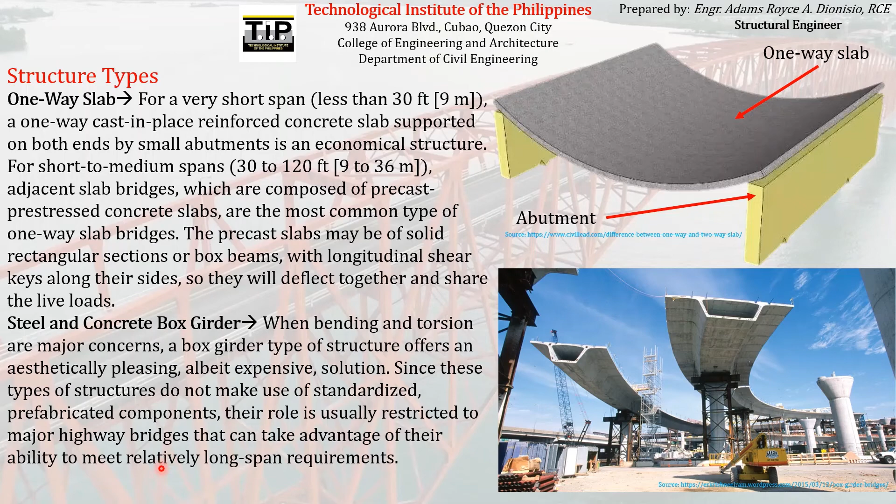So we usually use box girder type of bridge structure for relatively long span requirements. The only disadvantage of using box girder is that it is expensive, because there is no standardized way to prefabricate its components. Although, as you can see here on the photo, one of the advantages of using box girder, other than being useful for relatively long spans, is that the space inside the box girder can also be used for additional traffic, although for light traffic only, like light vehicles or pedestrians. The heavy traffic that will be accommodated by the box girder can be put on top of the steel or concrete box girder itself, and then the clear space inside the box girder can also be utilized as additional pedestrian way or an additional road for light vehicles. So that can be another advantage of using steel or concrete box girder, other than its usefulness for relatively long span requirements.

Superstructure may be designed to be supported at pylons with bearings, to be fixed at pylons, monolithic with pylons, or to be floating or no support at pylons. Low cost, ease of construction, and aesthetics are the major reasons why this type of structure is now a popular choice for medium and long span bridges.

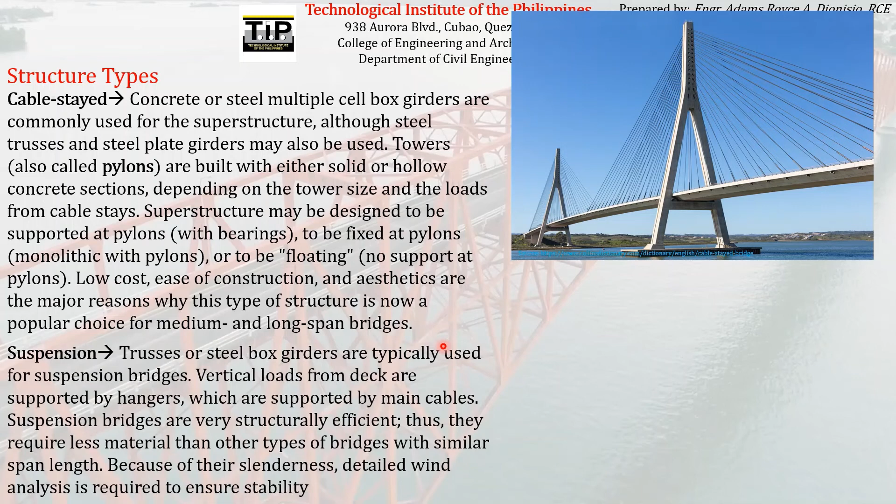So suspension bridges are structurally efficient, meaning they require less material compared to the other type of bridges. Although suspension bridges are somehow slender, that's why they are critical with respect to wind or lateral loads. That's why whenever we design suspension bridges, we must ensure that detailed wind analysis is conducted so that we can assure that the suspension bridge will be stable.

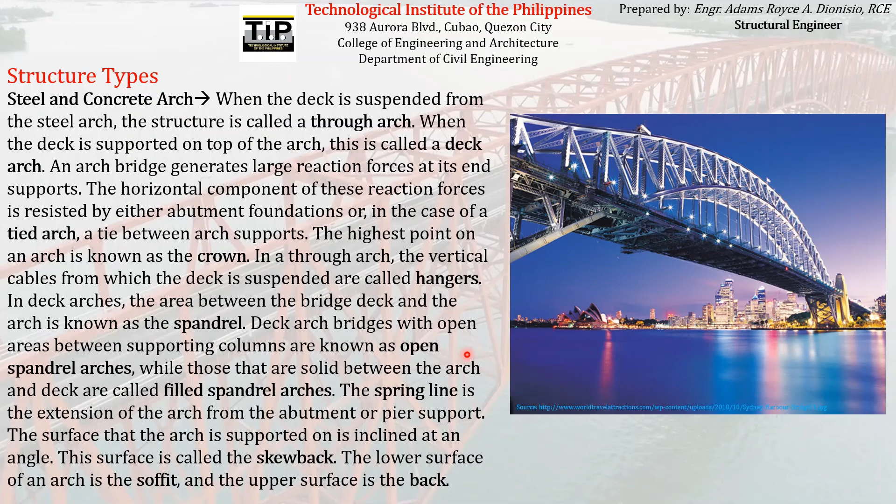So the last type of bridge structure that we will study is the truss type of bridge structure. So the truss members of a truss type of bridge structure are typically fracture critical members, meaning there is no redundancy in the load path. So should one member fail, the whole structure would collapse. The construction and maintenance costs of truss bridges are very high. Due to this, very few truss bridges have been built in the past 50 years.

So for a truss type bridge, maintenance is very important to ensure that every member of the truss is in good condition. Because as I've said before, the members of a truss are fracture critical members. So that just means that if one member of the truss fails, the whole truss structure will collapse. So there must be a very delicate maintenance of every member of the truss just to ensure that the members are in good condition.

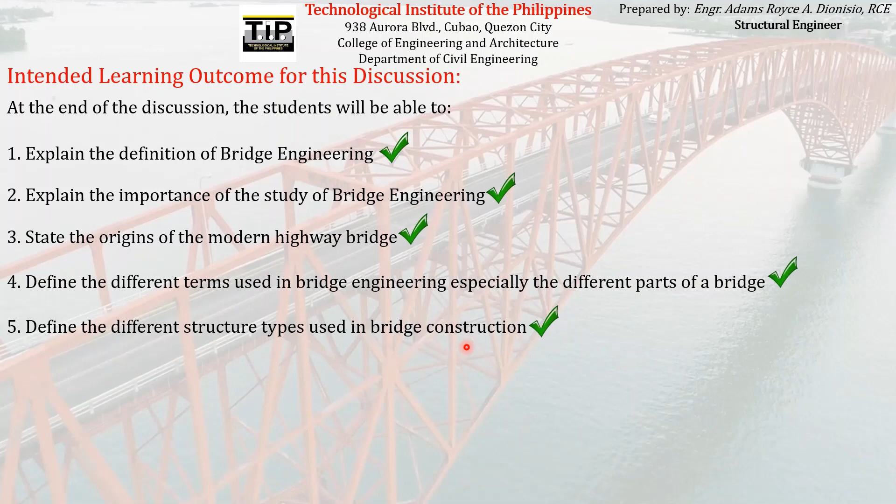So just to summarize what we have learned on this discussion, let me just review or have a recap of what we have learned on this discussion. So on this discussion, we have learned that bridge engineering is an engineering discipline branching from civil engineering that involves the planning, design, construction, operation, maintenance, and rehabilitation of bridges to ensure safe and effective transportation of vehicles, people, and goods. So as I mentioned a while ago, bridge engineering is different from bridge design.

Bridge design is actually another subject, another course that you have to take after you have taken bridge engineering. Although again, in our school, in our curriculum, we have no bridge design. We have no separate bridge design course. So we will try to study everything about bridges in our course, Bridge Engineering. Although again, as I've mentioned, bridge engineering is actually a broader subject than bridge design, because actually bridge design is just a part of bridge engineering, as you have seen on our definition.

Because bridge engineering encompasses everything about bridges: the planning, the design, the construction, the operation, the maintenance, and the rehabilitation. So we can clearly see that bridge engineering is a broader subject than bridge design. So in our subject, in our course, bridge engineering, we will not be focusing more on the design of bridges, but we will be discussing everything about bridges: the planning, design, construction, operation, maintenance, and rehabilitation.

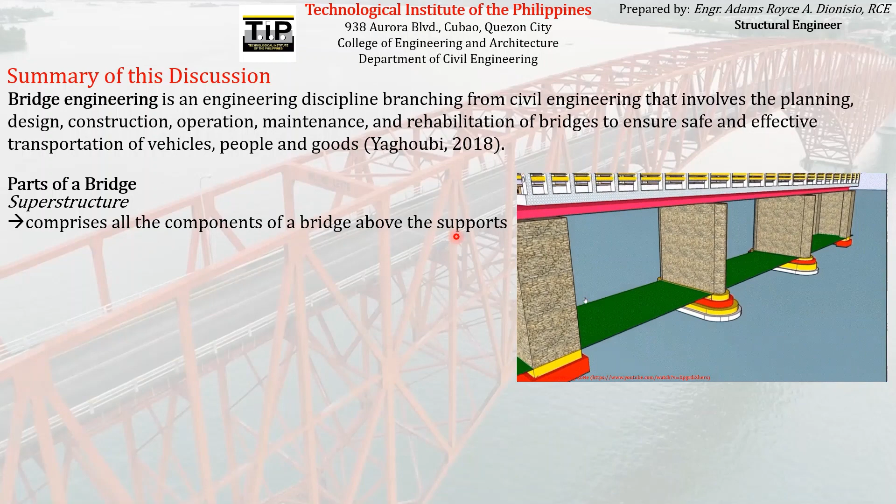Another thing that we have learned on this discussion are the different parts of a bridge. So we have learned that there are actually general terms that we usually use to describe the different parts of a bridge, namely the superstructure. So the superstructure comprises all of the components of a bridge above the supports. And then another general term that we usually use to describe the different parts of a bridge is the word substructure. So substructure consists of all elements required to support the superstructure, or in other words, substructure are all of the elements that are below the superstructure, or vice versa. Superstructure are the elements that are being supported by the substructure.

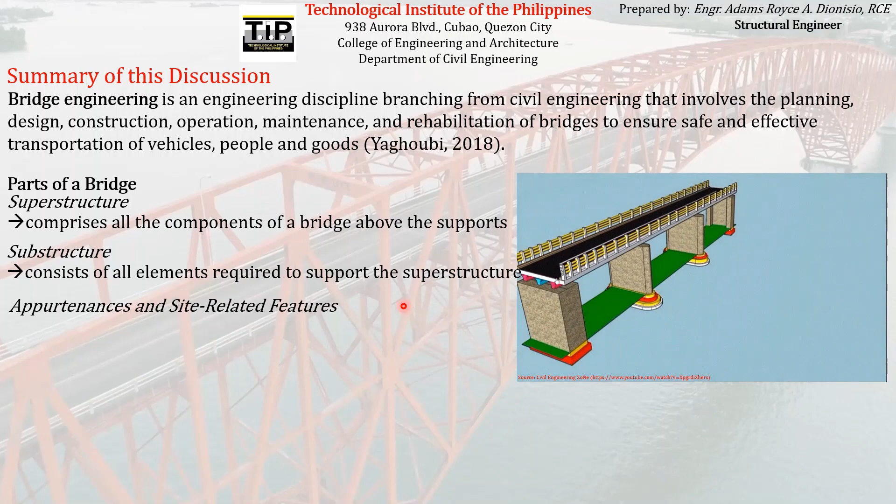And then the last general term that we usually use to describe some parts of a bridge, although these things are not actually part of the bridge, although they still play a vital role with respect to the functionality of the bridge. So we call those as appurtenances and site-related features. So appurtenance is any part of the bridge or bridge site that is not a major structural component yet serves some purpose in the overall functionality of the structure, like guardrail or the bridge barrier or the traffic barrier, etc. So these appurtenances, we can still call them part of a bridge, although they do not play a vital role on the structural support of the whole bridge. But still, they play a vital role on the overall functionality of the structure, our bridge structure.

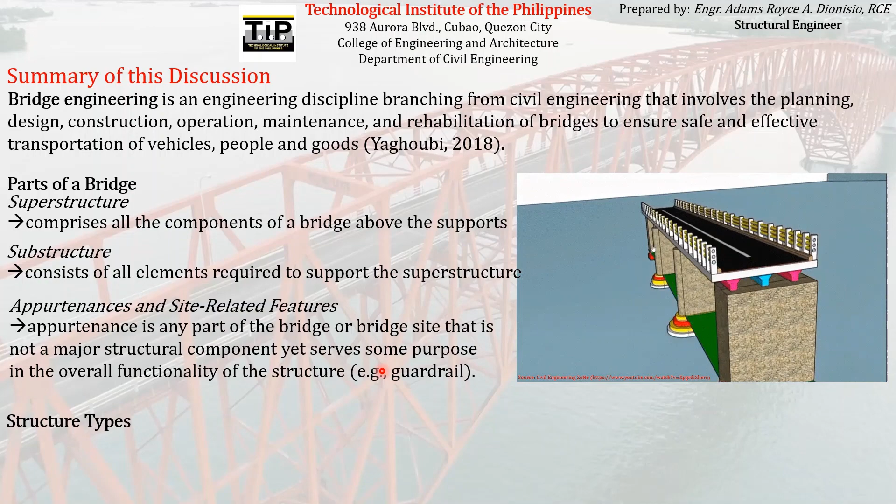So lastly, we have learned in this discussion the different structure types, which are slab on girder, one-way slab, steel and concrete box girder, cable stayed, suspension, steel and concrete arch, and truss. So we have learned that these different types of bridge structure actually have their own advantages and disadvantages over the other. So the choice of which structure type to be used depends on different factors that we have enumerated before on this discussion, as well as on the actual site conditions. So those are the things that we have discussed and we have learned on this discussion.